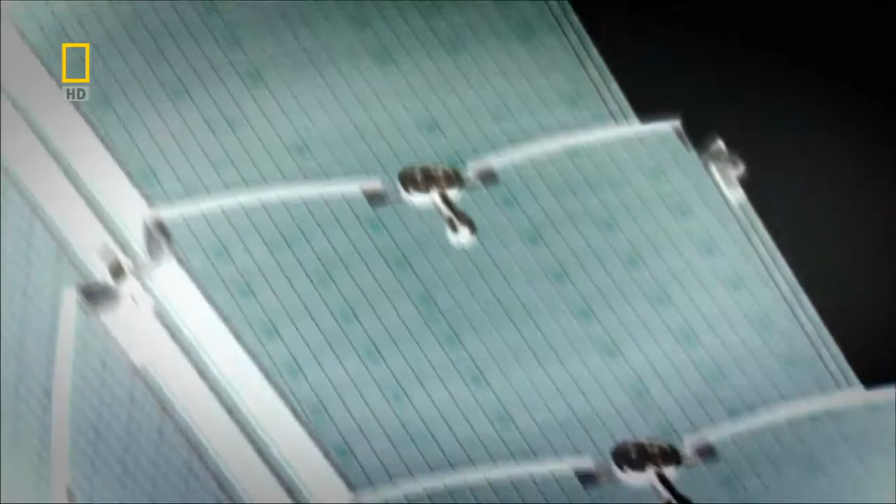This is Taipei 101, Taiwan's record-breaking skyscraper. Incredibly, it's one-third taller than the Empire State Building, and cost $1.75 billion to build. But Taipei 101 not only stands in a typhoon hotspot, but right beside an active earthquake fault line. It couldn't exist without the surprising engineering connections hidden deep within its design.

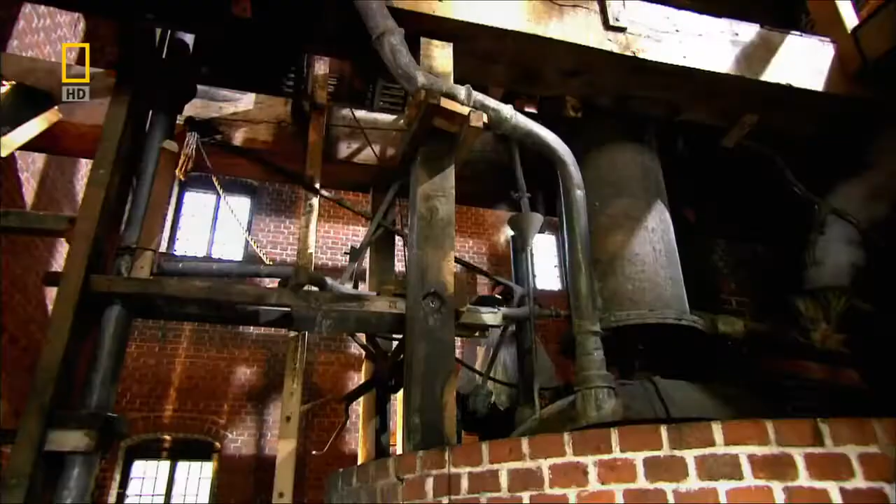A racing yacht—I can't believe the speed of this thing. A birdcage—that didn't last long at all. A steam pump. A safety belt. And a sports car.

So, what's all that got to do with one of the world's tallest buildings? We're about to find out.

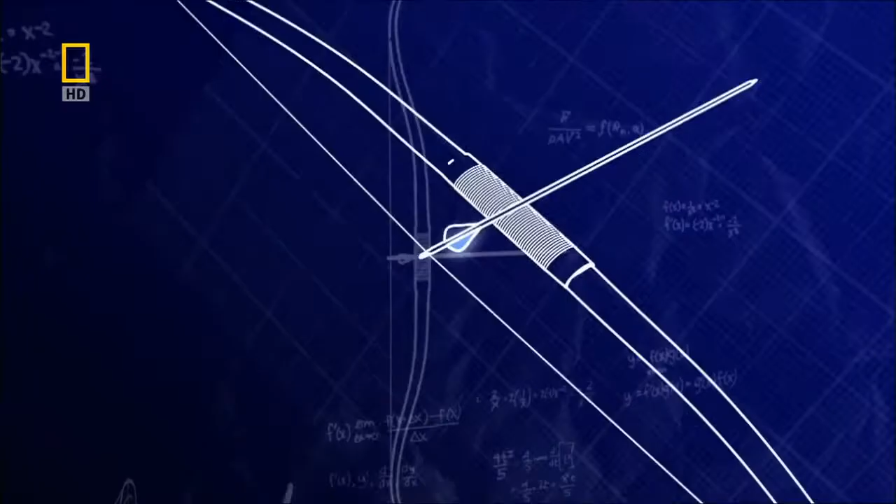I'm on a journey to explore some of the inspirations behind Taiwan's extraordinary skyscraper. In 2004, Taipei 101 topped the record books, reaching 508 meters. Everything to do with Taipei 101 is big. Very, very big, whichever way you look at it.

But what made modern skyscrapers like Taipei 101 possible? Bizarrely, inspiration is thought to have come from a birdcage. Less than five generations ago, skyscrapers like these weren't possible. Engineers feared really tall wood and masonry structures would collapse under their own weight. So the question is, who thought of making buildings with metal frames, and why?

Rewind to Chicago, 1871. The city is on fire. The inferno rages for 36 hours, killing over 300 people and destroying 17,500 buildings. The ruins reveal the cause: three months of drought turn the timber buildings into tinderboxes. As a result, the city bans wood construction. But Chicago continues to grow fast, and with land at a premium, architects search for new ways to build tall.

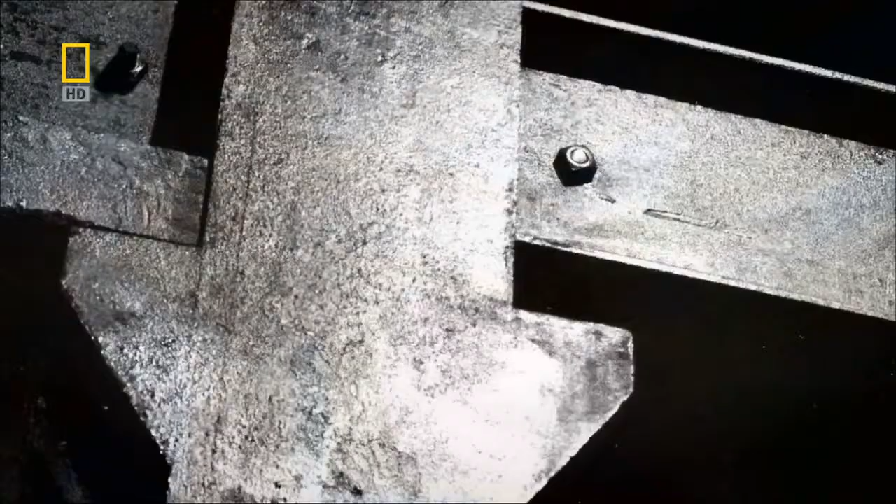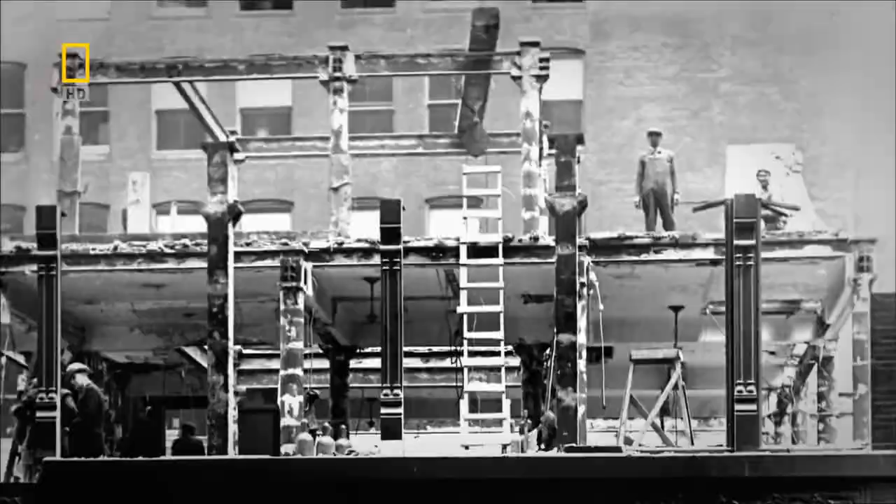Today, it may seem like any bird brain could come up with the idea of building with metal frames, but Jenney's innovation was inspired. He realized that if he bolted horizontal beams to the upright columns and transferred the dead weight of the walls to a metal framework, he'd create not only a lighter structure, but one strong enough to support multiple stories, one on top of another.

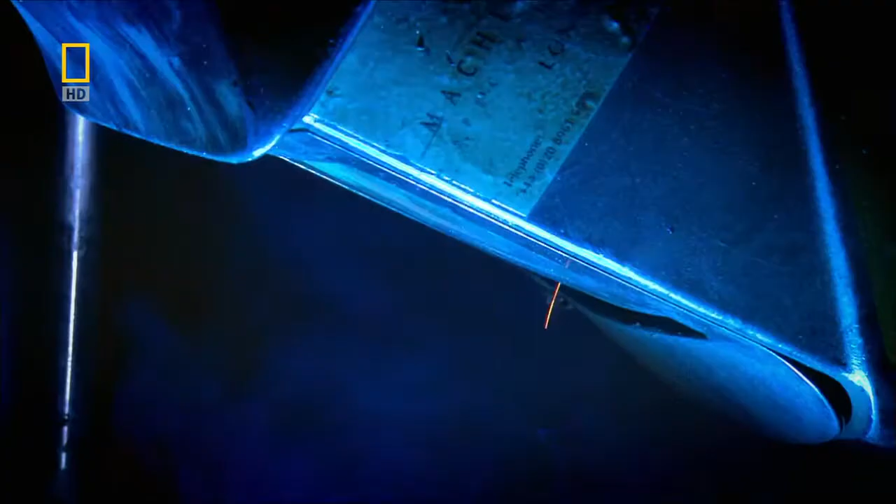I want to see for myself the kind of forces that a cage braced with beams can withstand. So I need some cages that I could destroy, test. In order to find out just what a brainwave LeBaron Jenney's idea was, I've come to a workshop that has, amongst other things, a 25-ton crusher on hand.

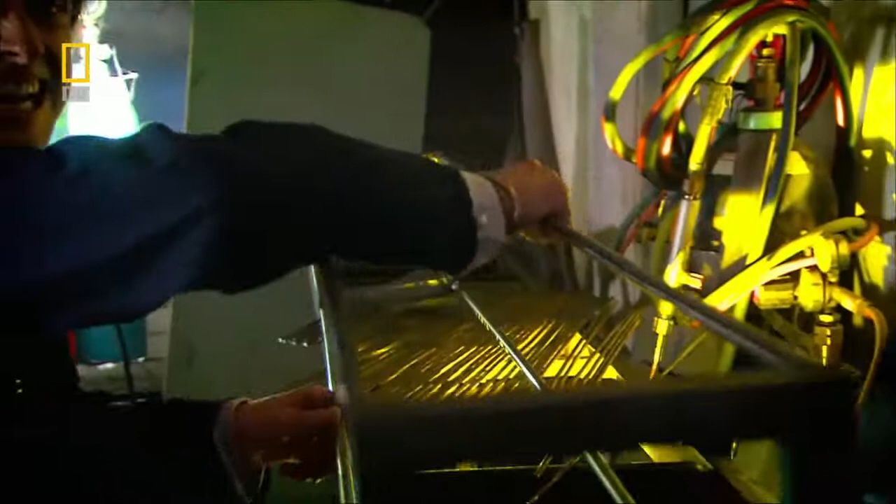Say these represent LeBaron Jenney's columns. What I want to do is see how much vertical load they can take—that's weight to you and me—first without, and then with bracing.

Structural engineer Brenda Marsh has set up an experiment to find out how much downforce it'll take to crush my metal towers. So, Brenda, I know this is all about sort of bracing, or beams, but how are we going to show that? How's it going to work? Yeah, what we're going to do is we're going to take this sample here that has some columns with no beams in it whatsoever, and we're going to stick it in a press over there until it breaks.

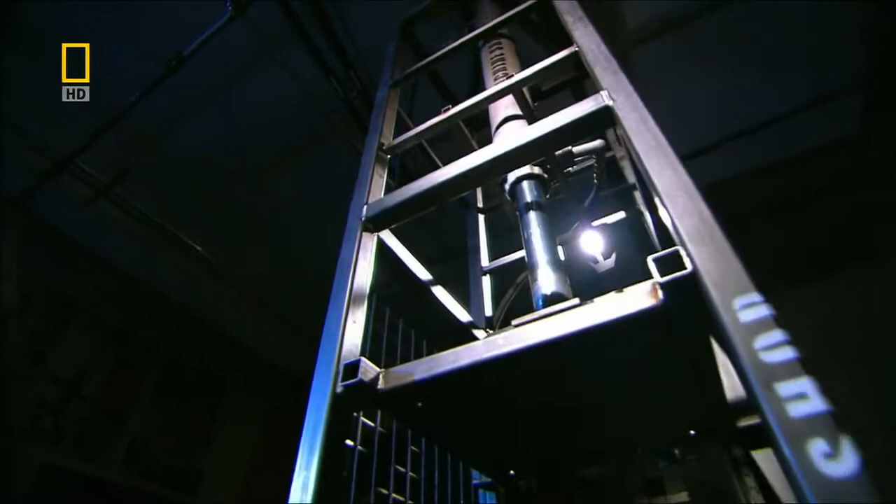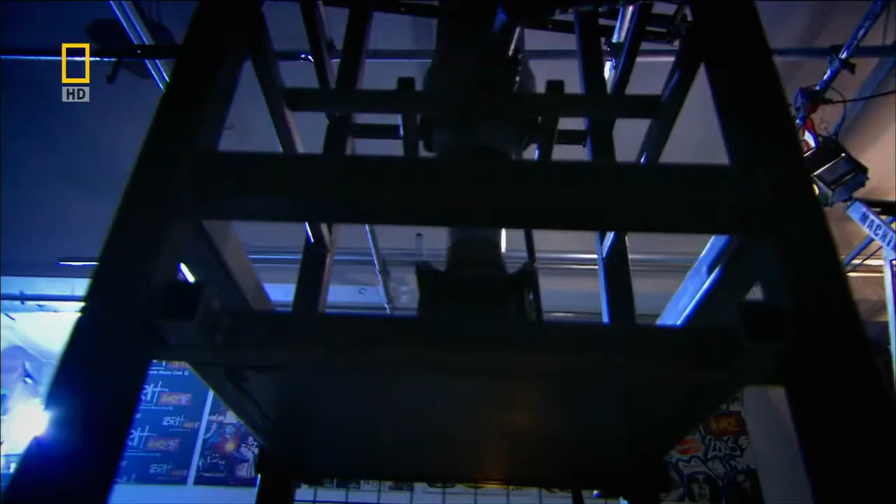What am I doing? You're going to operate the machine. Okay, that's a mistake. Right, I'll do that. You better put that in the business end of it. So I need to lift the ram thing up—apparently it's this lever. Okay, now what I want you to do, Richard, is lower the plate down a little bit. Don't apply the pressure yet. There you go, okay, stop. We need to put some safety goggles on. Oh, okay, of course we do. Make sure we're at a safe distance—that'll protect us. Right, so here comes your vertical loading. Okay, applying it now.

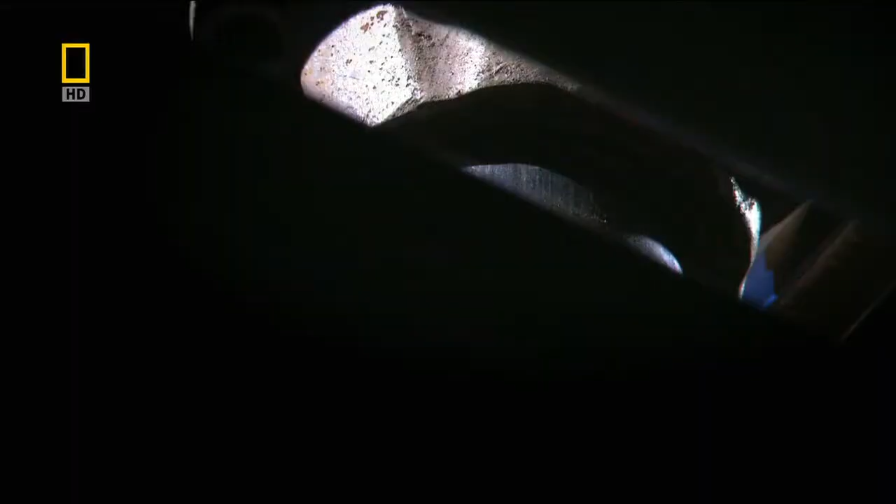The crusher can exert 23 tons of downward force, the weight of a locomotive. Yeah, oh, there we go. You can see the columns starting to buckle. No, it's not—there we go. The whole thing's starting to sway now. It's completely—it's fantastic, look at that. And that's gone. That didn't last long at all. Almost immediately, the tower gives way. And that's it, it's failed. This is what worried the early engineers: a structure like a skyscraper collapsing under its own weight.

That would be bad in a building, wouldn't it? That would be very bad. We design buildings so they don't do that.

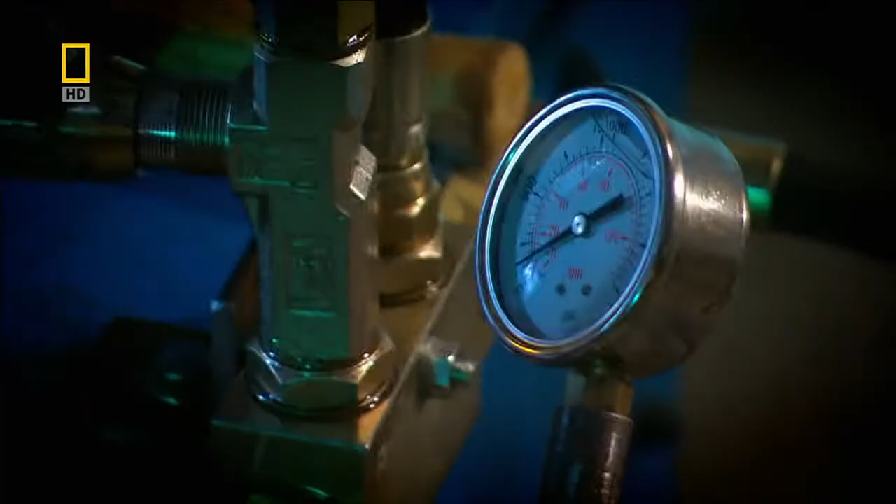Okay, we're all set to do that again with structure number 2. This is the new one. I can see it's got more bits on it, but what are the key points? What makes it so special? What we've done on this one is we've taken what we had in the original structure.

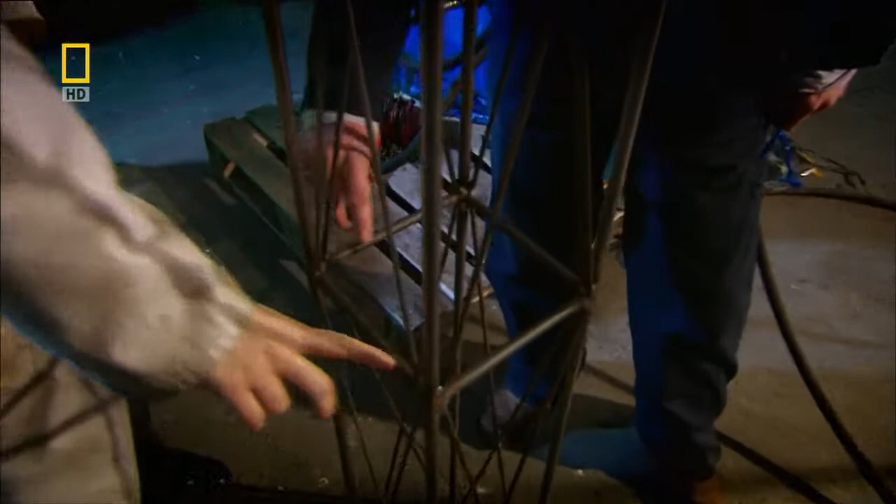So that's these 4 columns. And we've added in some beams here. The original structure, when it failed, the columns tended to bend outward, so what we want to do is hold those in place to stiffen up the columns. So that means all 4 are working together, rather than bending and bowing. Yes. We've got extra bits on as well.

What are these bits? In an original building, you would have walls or something else that keep everything in place, so we're simulating that in this structure with the cross bracing. So for the purposes of this experiment, the important bit is these beams across here.

Can Jenney's tiny horizontal beams help the tower stand any greater downforce? Okay, here we go. You watch the structure, I'm going to keep an eye on the gauge. Straight away, that's what we were on before.

20. That's twice what it took before. I can hear it creaking a little bit. I'm going to increase it. The columns are still holding. Increasing it now. The crusher piles on the pressure. It's just like adding multiple stories to a tower as you build taller and taller. 25. That's going. Oh, there we go. Started to buckle.

I've broken your clever one. But it did a lot better. It was 2.5 times stronger. And that's exactly what I wanted to show, that if you brace off the columns it can take a whole lot more load.

Can I say something, though? Because instinct tells me now, tie it together, it'll work. Why? Well, it's obvious now because we've seen it, it happens all the time. But before anyone ever thought of it, it's not the obvious solution.

Using his inspired idea, Le Baron Jenney builds the first modern skyscraper, the Chicago Home Insurance Building, completed in 1885, supporting its entire 10 stories on a metal frame.

So, thanks to a birdcage and some smart thinking, the great-great-grandfather of this monster tower was born. That's how structural engineers could build this and all its record-breaking 101 floors. But it's more remarkable than just scale.

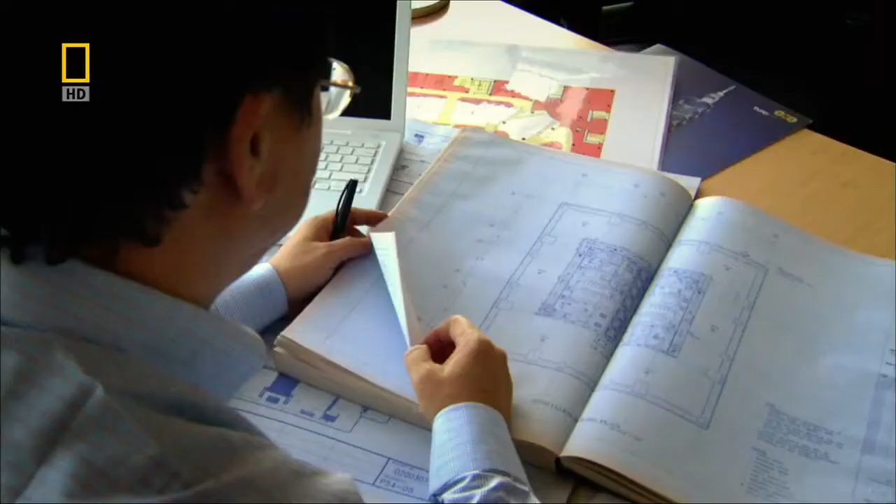When you build one of the tallest structures in the world in the middle of a notorious earthquake hotspot, how do you make it strong enough to stay standing, but flexible enough to withstand the potentially disastrous effects of a seismic shock? The award-winning Taiwanese architect of Taipei 101, C.Y. Lee, found inspiration for his solution in nature, specifically his nation's long-standing connections with bamboo.

CY, what can possibly be the connection between an immense structure like Taipei 101 and bamboo? I mean, it's not made of bamboo, is it? No, it's not made of bamboo, of course, but in a lot of ways it's like bamboo. How? I think bamboo is a plant that doesn't look very strong, but it has this nature of elastic. It may bend a little bit, but it doesn't break.

Bamboo is a giant, fast-growing grass. The secret of its strength and flexibility is its internal shape. Bamboo grows in hollow, jointed sections, like a series of solid-ended tubes. These are separated by partitions that help reinforce the stem.

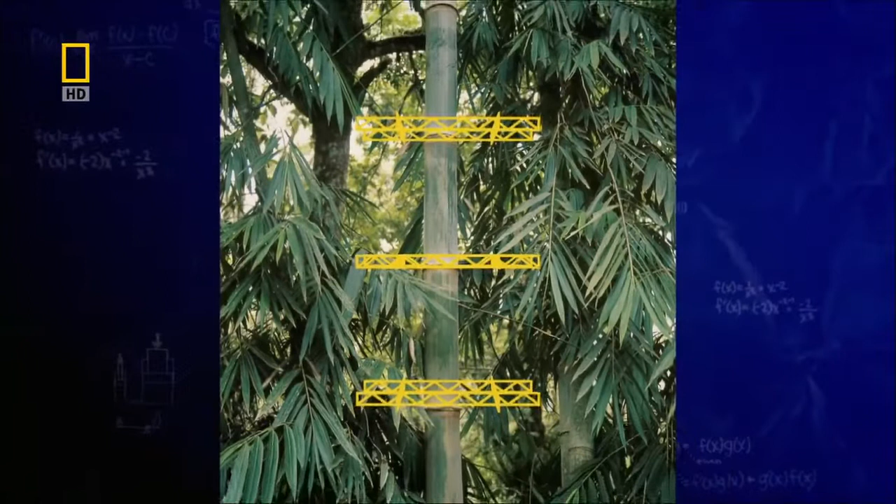Inspired by nature's solution, Wang designs giant steel trusses to connect across the columns at every 8th floor on Taipei 101. This bamboo-inspired design must meet strict seismic targets.

The owners required Taipei 101 to withstand the most powerful earthquake expected to hit the city within a 2,500-year cycle. But nature tests C.Y. Lee's design even before it's complete.

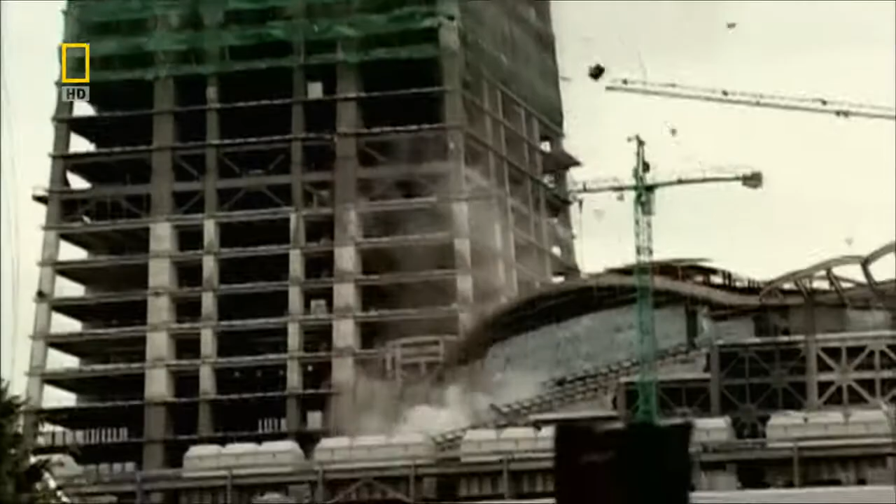In 2002, an earthquake strikes. Shockwaves tear across the island. Taipei 101 shakes violently. Anything not firmly attached crashes to the streets below. Dislodged construction cranes tragically take 5 lives. But Taipei 101 stands firm and construction resumes.

2 years later, the completed megatower is crowned the world's tallest building.

But by designing a structure to withstand quakes, Wang creates a new challenge. Tall buildings sway in high winds and even risk collapse in extreme storms. And Taipei 101 is no exception. In fact, it's not just windy, it's smack bang in the middle of a typhoon hotspot. Typhoons, Asian hurricanes, can batter Taiwan 3 or 4 times a year.

In 2007, 160-kilometer winds kill 9 and cause $100 million of destruction. To keep Taipei 101 standing in a superstorm, C.Y. Lee turns to an engineering solution developed 3,500 years ago.

To discover this ancient engineering secret, I'm meeting Ken Maschke from the company that helped design Taipei 101. Ken wants me to try sailing, but not in an ordinary sailboat.

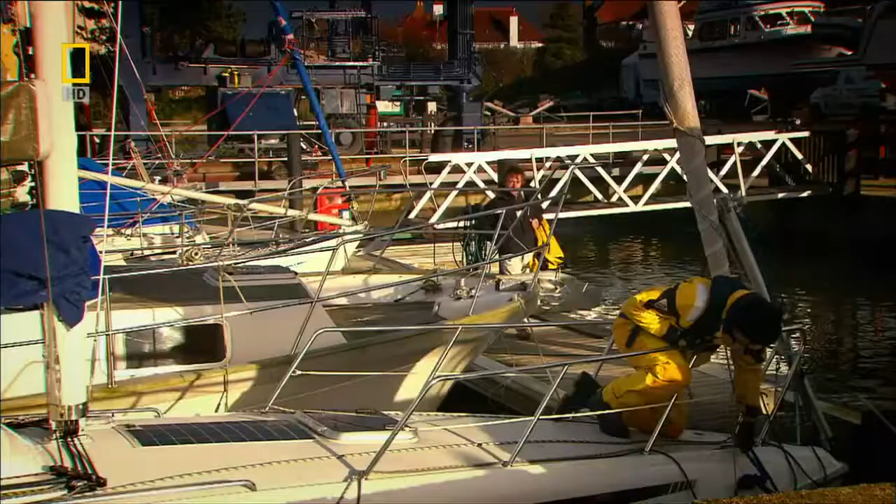Ken. Hey, Richard. Hi, how are you doing? Come on board.

It's narrow, light, and has no keel sticking down into the water for stability. So how can it stay upright against the wind?

This extra hull, one of two, is the engineering connection this craft shares with Taipei 101, and why Ken's got me on a sailboat. Now it's got me working. These clever devices are called outriggers. There it goes. They keep a sailboat stable in high winds. Look at that.

Before we hoist sail, Ken explains the basic principle of the outriggers. If you stand with your feet together and I shove on you, you're likely to fall over. If you spread your legs, it's going to be a lot tougher. Now, the same thing, in essence, is what we've done here. We spread out the distance between which the force acts.

The idea of outriggers goes back 3,500 years to the Polynesians. Using them meant the early mariners could paddle or sail fast and stay stable. I just hope these outriggers work as well for me today. Looks a bit cold in there.

With sails up and stabilizers out, it's time to see if we can push Ken's theory to the limit. I can't believe the speed of this thing. Today, using outriggers like these, yachts can sail across the Atlantic in just 4 days.

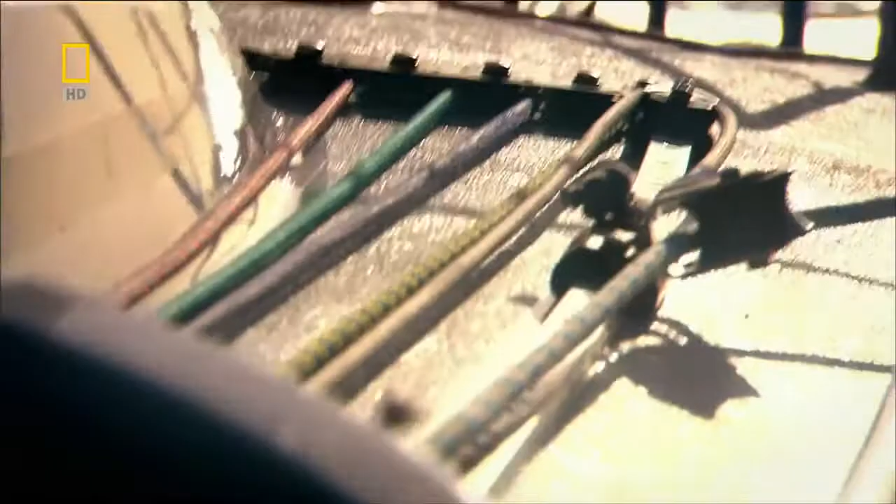Can this go over? Yeah. Would you mind awfully if it didn't? When it works, it really works.

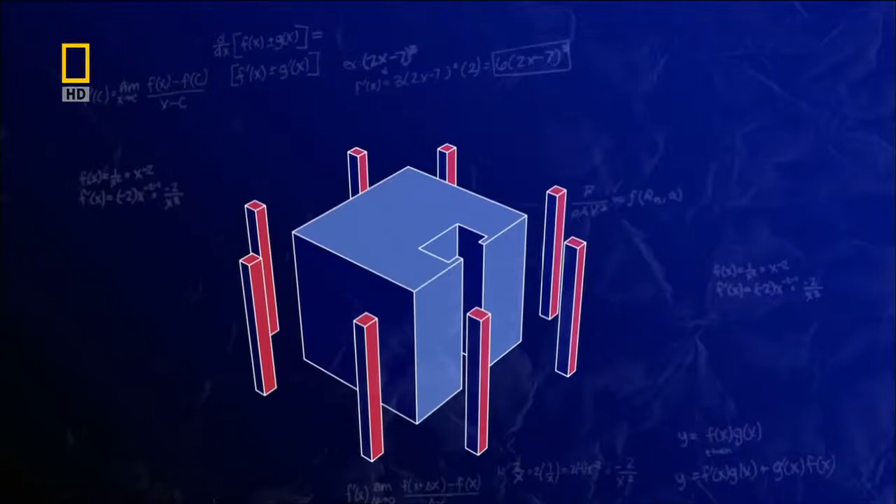I can see how these outriggers work on a boat, but the same theory on a building. How? The outriggers are part of the wind-resisting system, which includes a central core that's very stiff, but not stiff enough by itself. So we add these outrigger trusses to transfer force out to the exterior columns, like the pontoon that you're standing on right now. We can take the outrigger idea and apply it all the way up the building. So actually in Taipei 101, we have outriggers every 8 floors.

With a building as big as Taipei 101, every structural challenge is supersized, especially when working with the construction world's favorite material, concrete. Every floor on Taipei 101, including the 101st, is concrete.

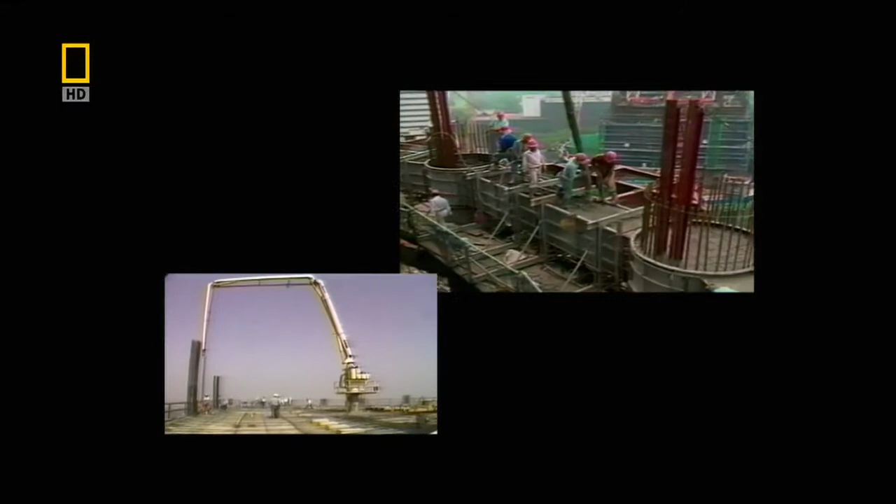To pump concrete that high requires a super pump that has its origins in the 18th century. Rewind 300 years. The English mining industry is in trouble. The deep mines are flooding, and the man and horse-powered pumps available can't drain water fast enough. The mines are going under.

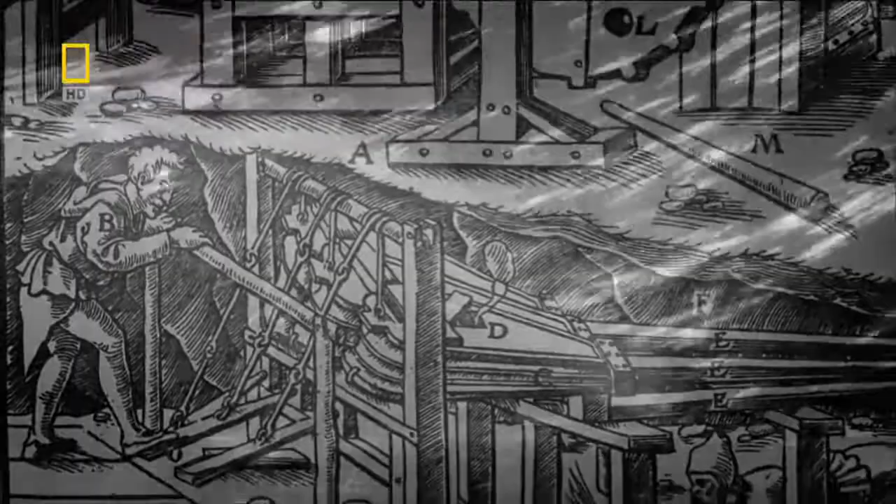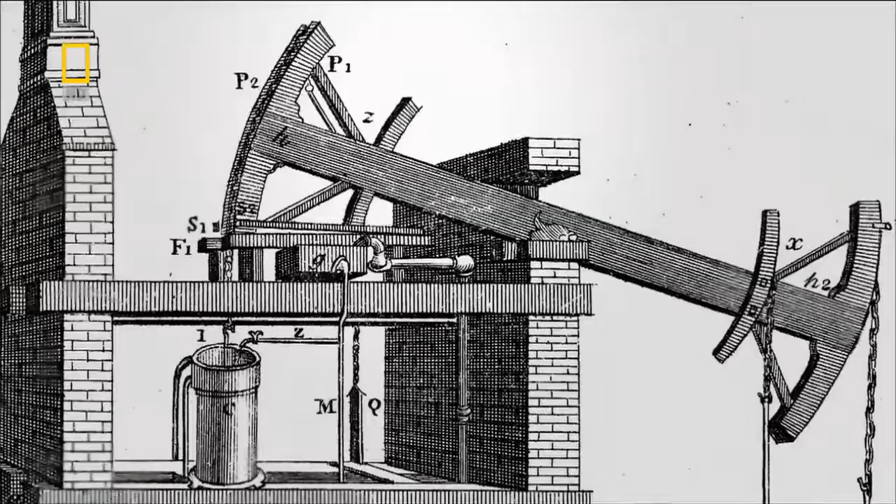Inside this modest building sits the machine that saved the day and kicked off the Industrial Revolution. It is the result of a stroke of genius from an inventive preacher and ironmonger, Thomas Newcomen. This is Newcomen's Nodding Donkey, the first piston-powered pump, and the first really practical engine for pumping water.

Newcomen's idea was to harness the power of the pressure difference created by a vacuum. He used it to move a piston. It works on the vacuum created by the steam when it's condensed, on the principle that steam occupies a certain amount of space, but when you cool it and turn it back to water, it occupies a fraction of that space.

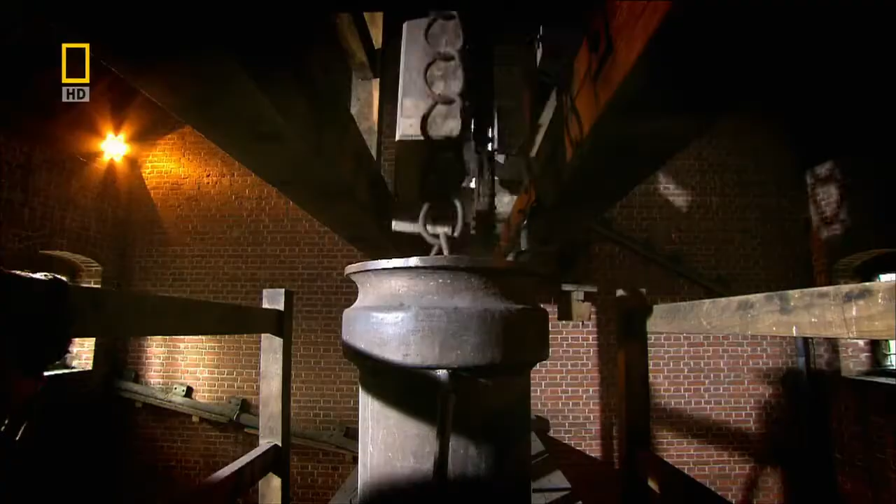So under here is the water tank, and under that is the heat, heating it up in the boiler as steam up into that big cylinder, which is the piston. That pipe goes into the bottom of the piston and sends cold water in, which condenses the steam, and suddenly that huge volume of steam is reduced to just a tiny volume of water. Then atmospheric pressure outside on top of the piston is greater than the pressure inside, and it's got no choice.

The piston has to come down, drawing the beam that way to do its work. Then it's counterbalanced, so it just pulls the piston back up to the top. More steam goes in, condenses it again, and draws it back down. They were very clever.

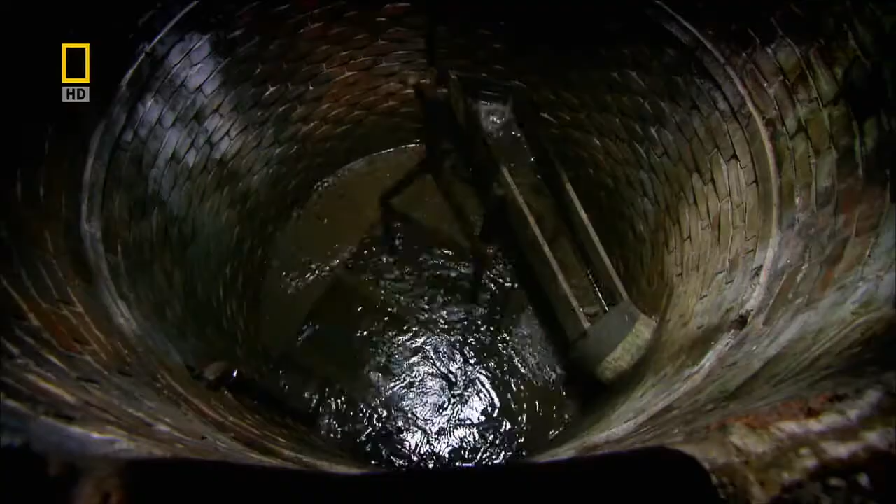Throughout the rest of the 18th century, Newcomen's invention drains countless mines, helping fuel the Industrial Revolution. 24 years after his death in 1753, the first Newcomen-style pump crosses the Atlantic to begin draining a copper mine in New Jersey.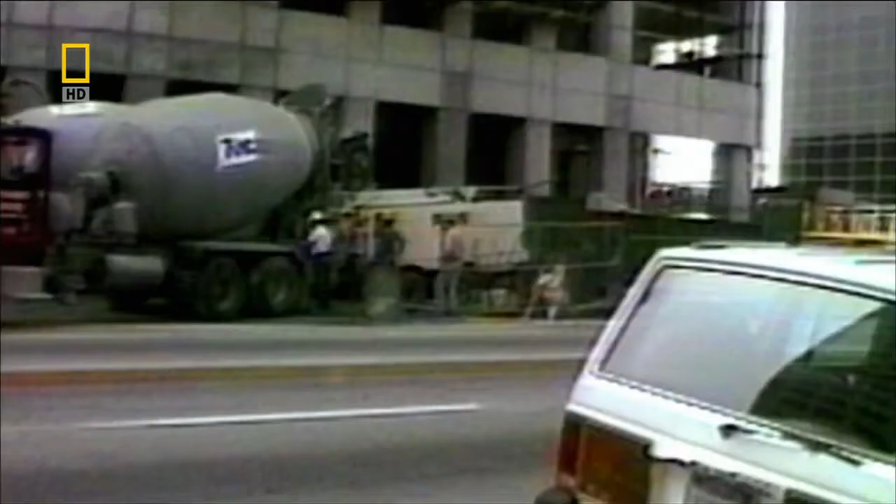Fast forward two and a half centuries to the offspring of Newcomen's engine. These powerful piston pumps use a vacuum and mega pressures to deliver concrete skyward and into the record books.

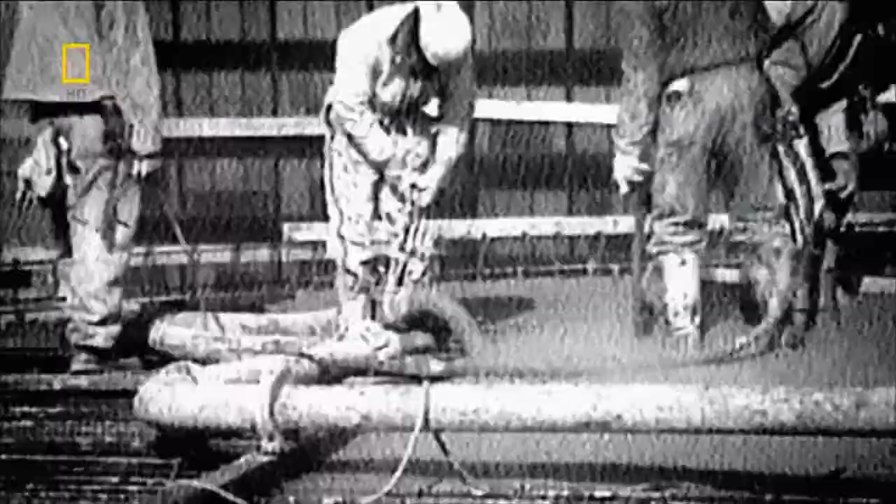In August 2003, a world record was broken, just up there. It was the highest anyone had ever pumped concrete on a building. It had to be raised 101 floors from down there. A pipe filled with concrete this high weighs well over 13 tons, and pumping it takes technology Newcomen could only dream about.

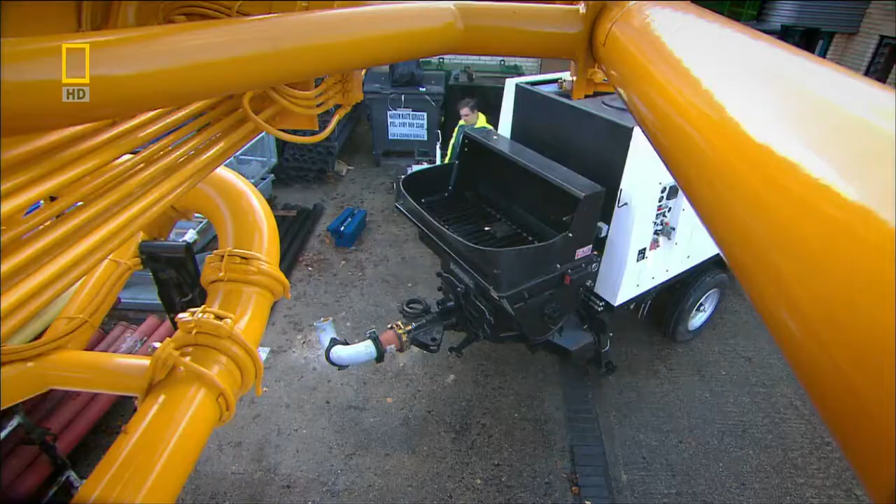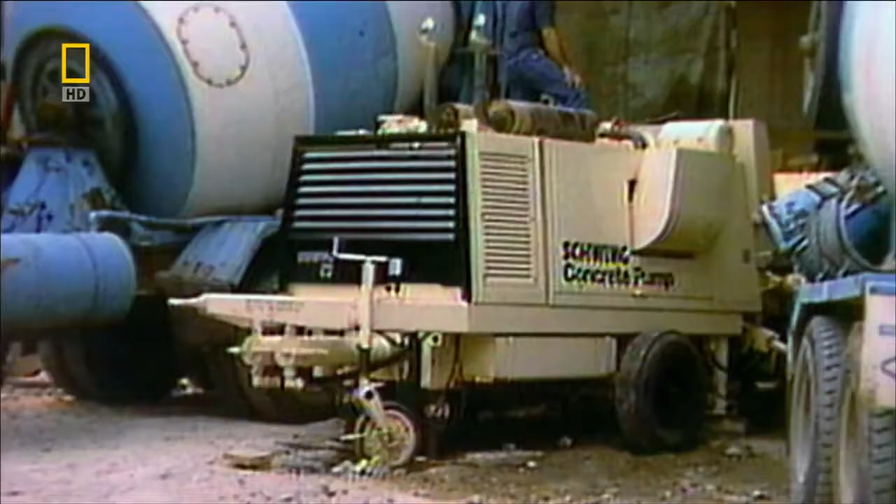Pumping concrete is big business, and as buildings get higher, the technology to power it to the top gets more sophisticated. This is the business end of a pipe network that extended over 440 meters that way, a chain of interconnected pipes stretching to reach the high floors. On Taipei 101, the pump sits near the base of the building, and the rooftop lies 4.5 football fields above.

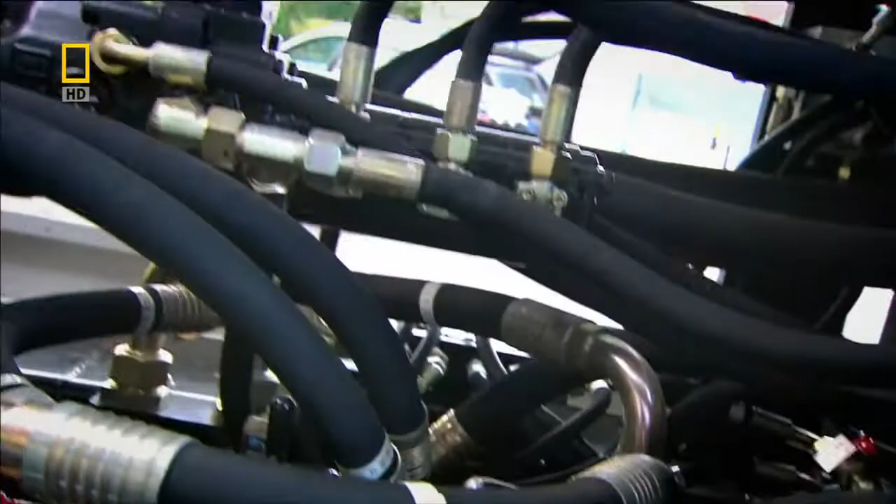The concrete is kept flowing by a super pump. Meet the 12-cylinder, 419-kilowatt Deutz diesel engine. This is the heart of the operation. Literally, it's the pump that keeps the construction alive. The moving parts in here made it possible to pump the concrete even to the highest floors.

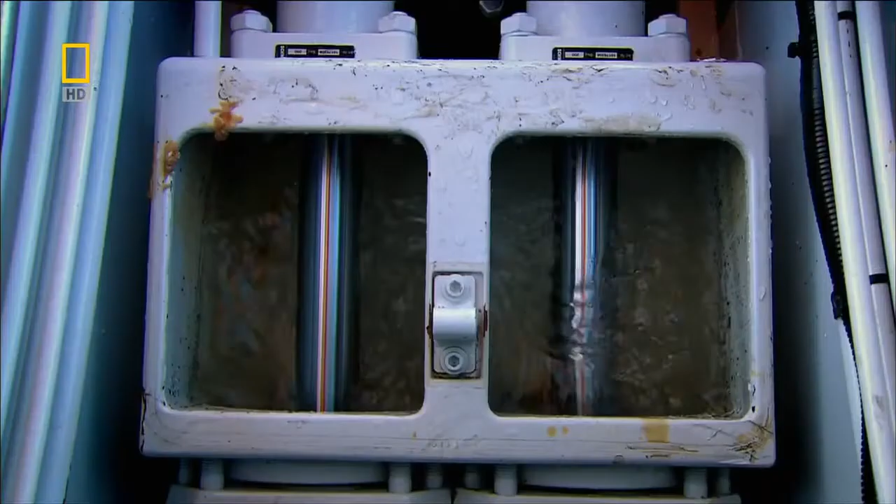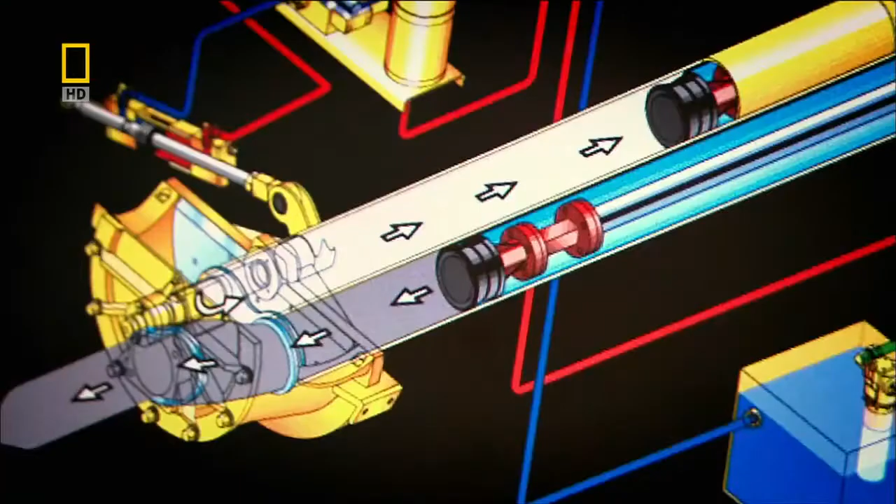A column of concrete must be kept flowing, or the mix will separate, or even worse, set. To keep a constant flow, the pump operates two pistons: one sucks while the other blows. A simple vacuum, like Newcomen's, pulls the liquid concrete in, then the huge diesel engine generates hydraulic pressure to push it out. It's Newcomen's ideas, just hundreds of times more pressure for a much weightier task.

I want to see what kind of pressures the Taipei 101 pumping world record used. So pump specialist Phil Suri devises a pressure demo that will blast my weight in concrete.

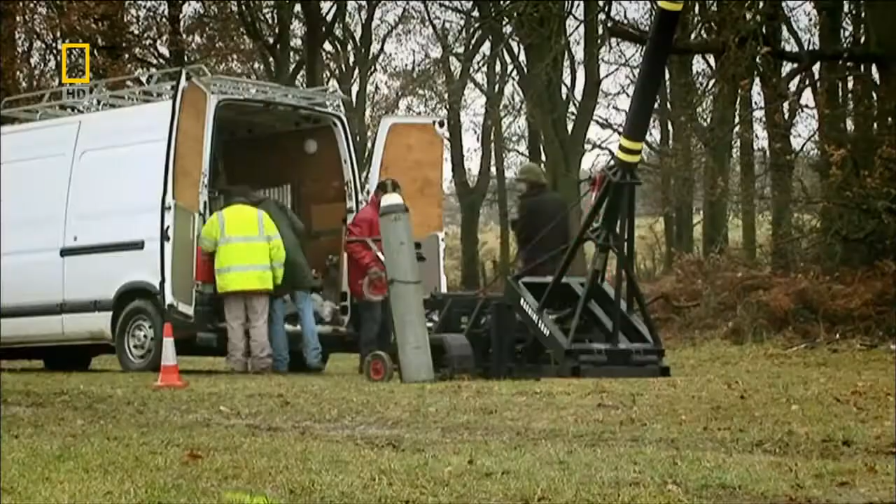It's difficult to get your head around the kind of power and pressure that modern pumps can generate using those old techniques. So rather than just talk numbers about it all, we've come up with a rather clever way of demonstrating very graphically what that power can do. We're going to use pressure to move some concrete, but we're going to do it in a rather different way.

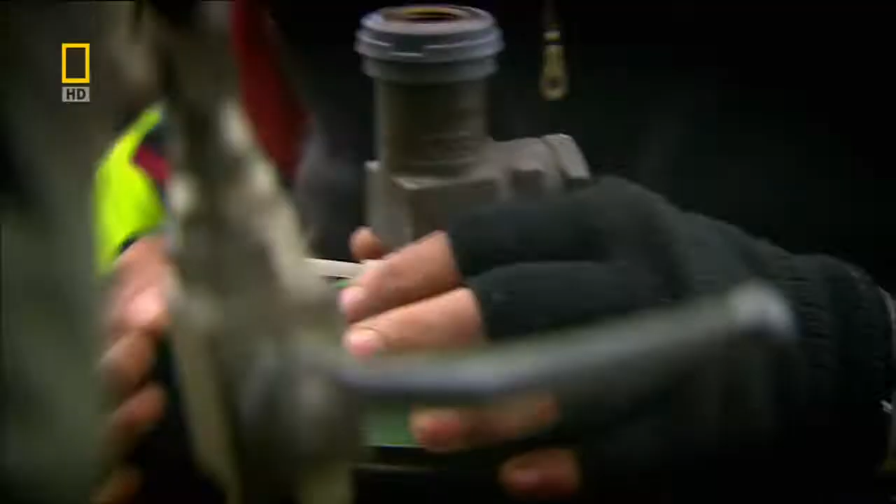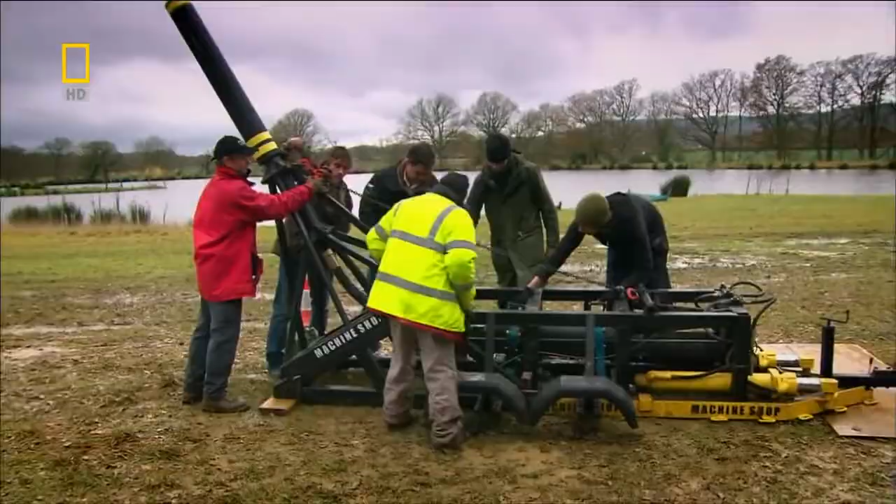Using a concrete missile as heavy as me, Phil and his team are going to demonstrate what 100 bar of pressure can do. One bar, named after the Greek word for weight, is about 1 kilogram per square centimetre, or roughly the atmospheric pressure all around us. I pump my car tyres to three times that, 3 bar, and that seems like a lot.

It's a firing cable. Huh? That's a cable to fire it. That's a trigger. Right, that's what I said. You trip over it. Well, sorry. I'm sorry. But this will give me an idea of what?

Of what 100 bar of force is capable of doing. At Taipei Tower, the pump we used there was capable of 200 bar pumping pressure. This is only capable of 100 bar. So your pump's roughly half? Twice, yeah, your pumps can generate twice the pressure of this. Exactly, yep. And you're just telling me that because you're proud of your pump. That's what that is. Yes, I am. Yes, you are. I am.

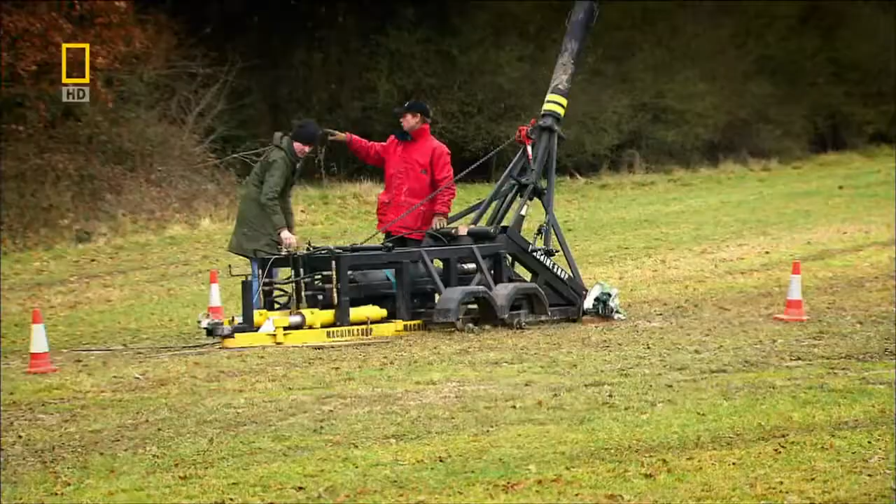This is a first for me, obviously. I've never seen a chunk of concrete my weight fired from a cannon. Phil is keen to see how far his concrete missile will go. The safety team are keen to make sure no one is on the receiving end.

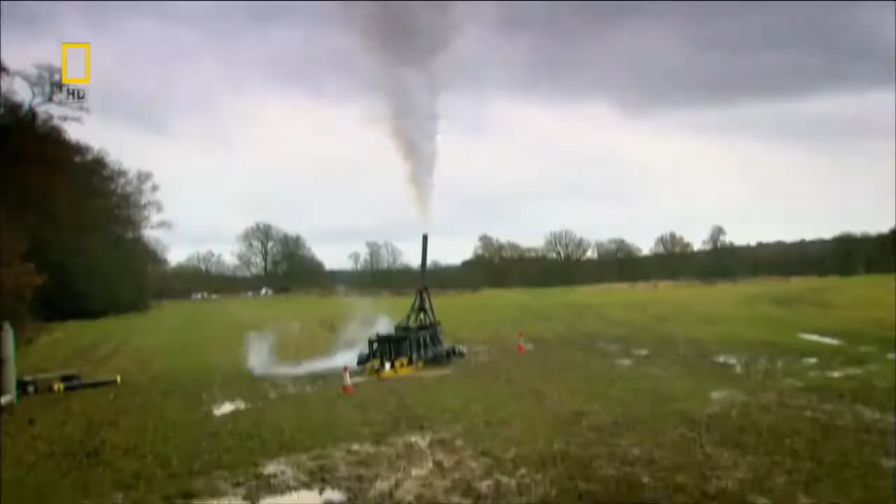Wow, so that's half the pressure on a lump of concrete the same weight as me. Yep, you're what, about 140 pounds? Yeah, 64 kilos. Okay, 10 stone.

Have we got to go and get that thing? Yeah, now. Let's do it.

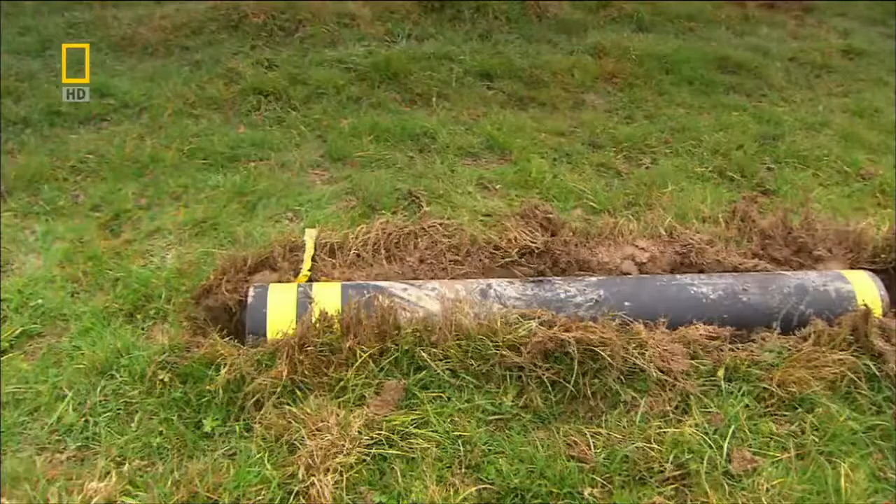The launcher blasts my concrete twin well over 90 meters. The top of Taipei 101 is 4 times that distance, straight up. And the record-breaking concrete column was 220 times heavier than me. I now understand the amazing pressures Phil's pumps achieve, sending concrete to the 101st floor of the Taipei Tower.

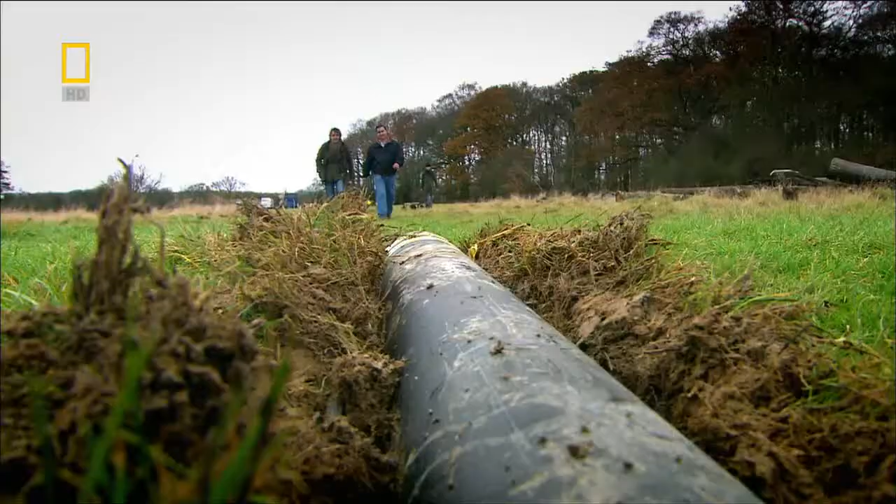It's buried itself, yeah. It's quite impressive, look at it. 106 paces.

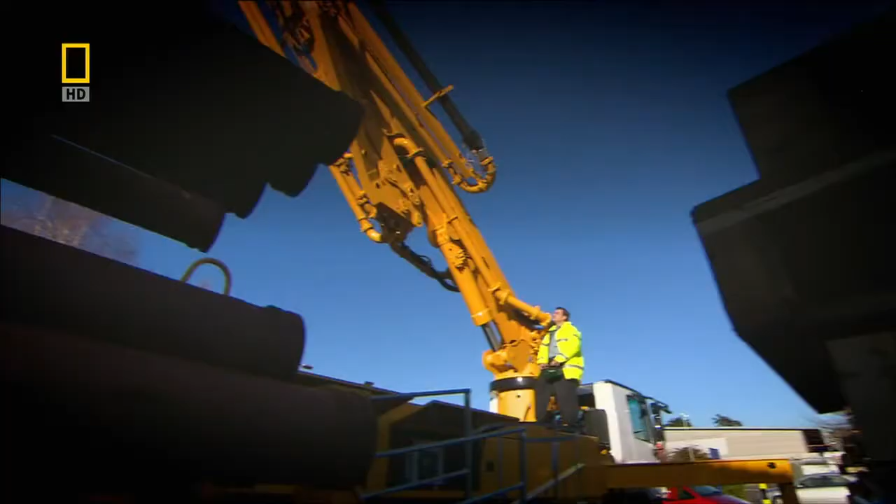The mechanical pump has come a long way from Newcomen's wheezing steam engine. That's how they got concrete to the top. But how do you transport people to such heights safely and quickly?

Which brings me to elevators and my next connection.

Whatever type of transport you're using, including elevators, there's a problem with going faster: you've got to be able to stop faster too. Higher speeds mean more braking loads, and more loads mean more heat. So how do you provide a braking system that can work without overheating and risking a fire? And what's that got to do with a sports car?

Being big and tall like Taipei 101 means lots of elevators. In total, 61 elevators are needed to keep the 10,000 people that Taipei 101 is designed for on the move. 34 are even double-deckers. But for tourists wanting a flying visit to the sky-high viewing gallery, these regular elevators aren't fast enough.

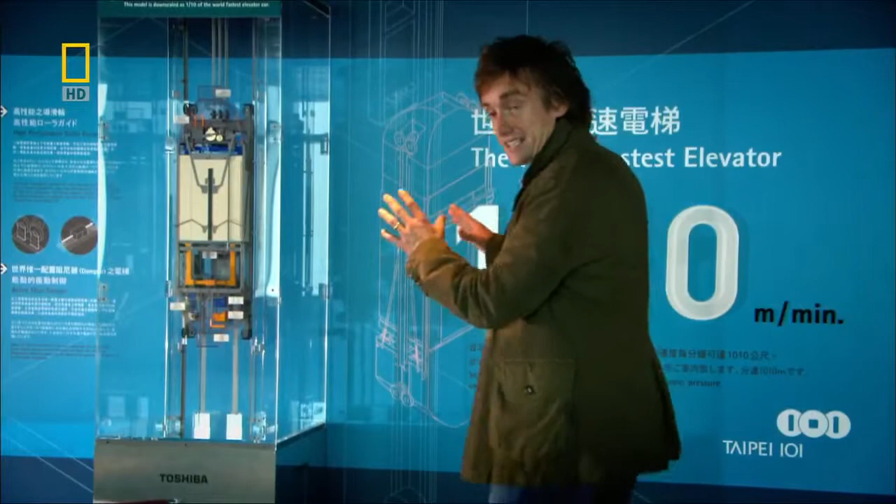The challenge is whisking a visitor like me directly to the 89th floor, super quick, but super safe. This is the answer, the world's most technologically advanced elevator. Well, obviously this is a model. The real thing's bigger, so you can get in it.

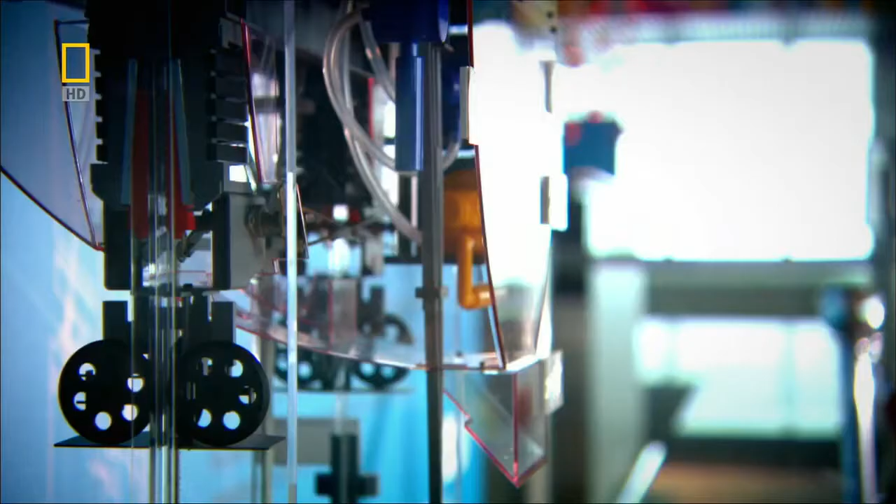Digitally controlled, it has a pressurized aerodynamic capsule with shake reduction and even earthquake sensing. The designers say it also goes really fast. I want to know how fast.

This elevator, one of a pair, has been officially certified by the Guinness Book of World Records as the fastest elevator in the world, and they've given it to me to play with. So they reckon it can do the next 84 floors in 37 seconds.

Ellie, when you're ready, if you would, thank you. In your own time, go. As soon as we start moving, I'll start the clock. Go, I think we've started moving. I can't tell, there's no noise. There's a fan. Apparently the whole lift is pressurized like an aircraft to help stop your ears from popping.

Talking of aircraft, this actually accelerates vertically more rapidly than a commercial passenger airliner taking off. And my ears are now popping. Right, we're 20 seconds in, 25. There's no sense that we're going faster than the city speed limit. We're breaking the speed limit. If we did this horizontally through the streets, we'd be in trouble. There's no noise.

And that's it, and that was under 37 seconds, and this is the top. The high-speed elevator launched me at over 60 kilometers an hour, almost half a kilometer into the sky. It's a long way up and a frighteningly long way down.

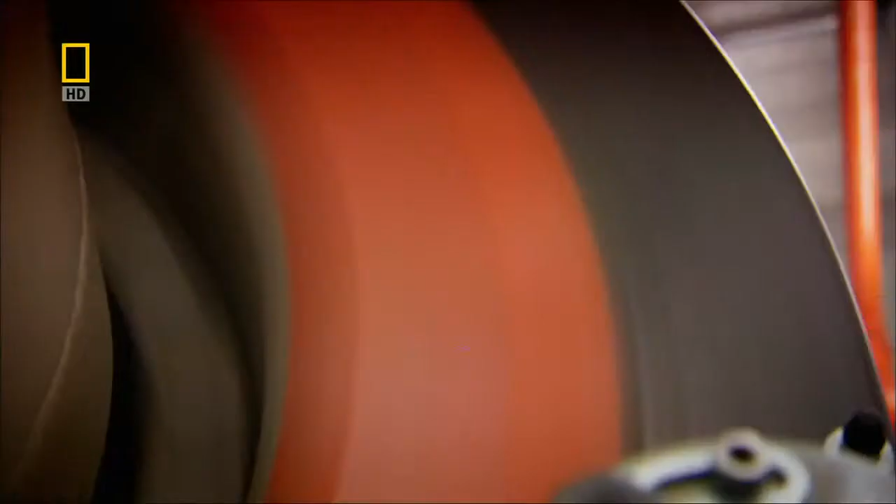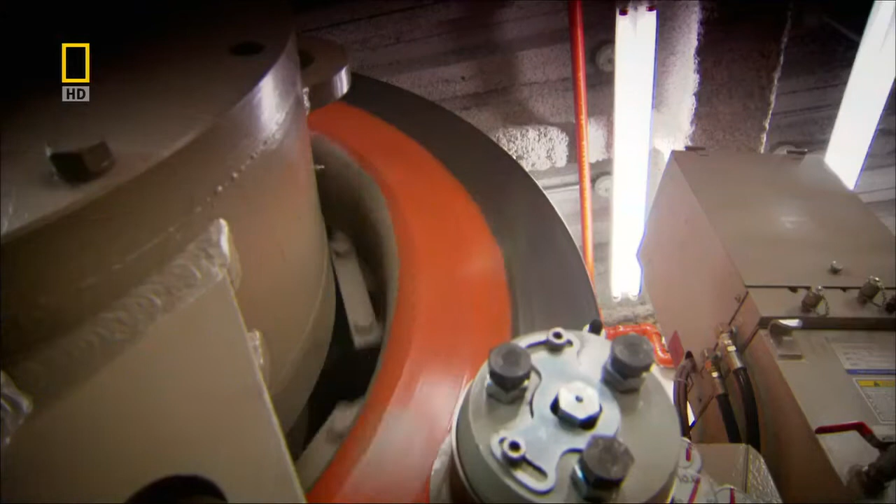If the elevator cables give way, it's an 84-floor drop with only the emergency brakes between you and the basement. In extreme events like this, metal brakes overheat and can fail. To halt Taipei 101's super elevators, the engineers needed a material that performs consistently, even when things get seriously hot.

It's an engineering line of thought that owes a lot to the automotive industry. This is a high-performance Porsche Boxster S, and my next connection.

Porsche was one of the first car companies to experiment with alternatives to metal brake discs. The material that performed consistently at extreme temperatures was ceramic. Their tests report the ceramic disc brakes don't get as hot as metal and can even grip better the hotter they get. I want to check out the difference in performance between metal and ceramic brake discs for myself.

So I'm meeting Craig Dawson, a motorsport engineering expert. So, Craig, what are you doing? Well, basically, I'm trying to get a benchmark for both the disc temperatures at the moment on the two cars. These two cars are completely identical in every way, apart from the brakes. That's correct. The yellow car has a traditional cast iron disc, like every modern-day road car. The red car has what is known as a ceramic disc.

The ceramic compound that makes up these brake discs is usually silicon carbide or silicon nitride. It's baked at extremely high temperatures to form a heat-resistant material.

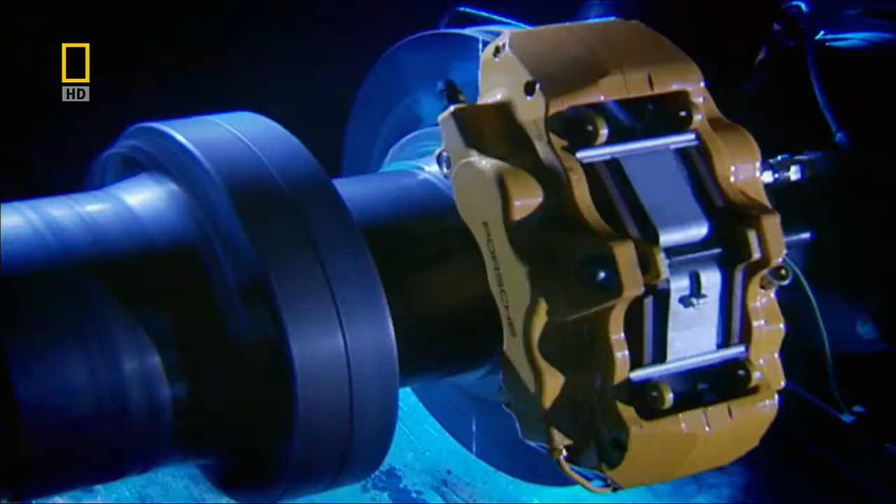Why is heat such an issue in brake discs? Well, with a cast iron disc, it can get to the point where it gets too hot. It begins to not work as well. The friction that it actually produces goes down. So the pads can't grip as well on the disc and it doesn't work as well once there's too much heat.

And there's double trouble when metal brakes overheat. Not only do they stop gripping as well, but if they fail to dissipate the heat, they can set fire to what's around them, as this very extreme example from the world of motor racing shows. We have flames! Not good for emergency brakes in an out-of-control elevator.

Almost the opposite applies with the ceramic brakes. It needs heat to get them to work in the first place, but they can go to a higher temperature as well. So how are we, with just these two cars, going to show all of that?

Well, basically, you're going to perform a series of repeated stops, which are going to build the brake temperature up. Here I go. 5 laps. The first test: drive very fast, then hard on the brakes 20 times over 5 laps. Reckon I can manage that. The idea is to build up the brake temperature so I can feel if their performance changes as the heat increases.

To gauge the temperature, we're using a camera that turns heat into visible light. The reds are hotter than the blue colours. White means it's getting serious.

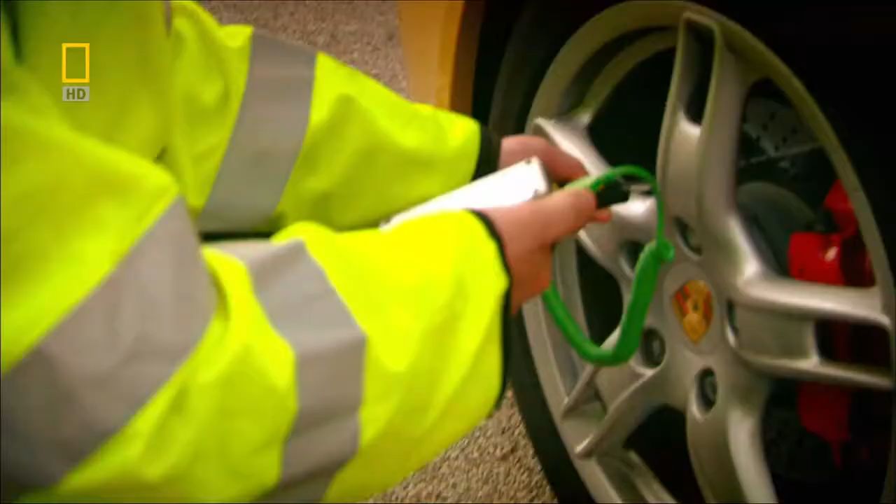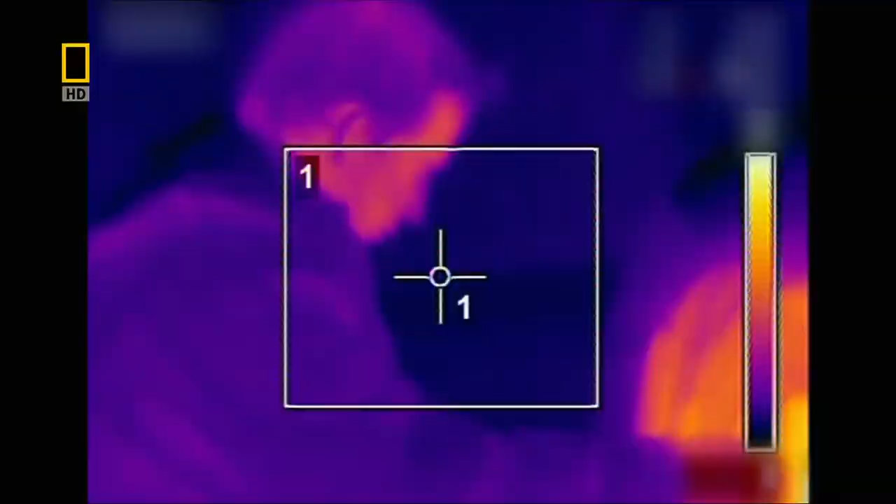Craig also wants to see how quickly they lose their heat. A lack of heat loss is what can build catastrophic temperatures in metal discs. I can smell brakes. I don't know if that's good scientifically. 627. Okay. When I pull in, Craig immediately checks the surface temperature of each brake disc. The readings on the front discs are well over 300 degrees centigrade.

They're still functional, but as hot as the inside of a jet engine. 290. Craig will take a further series of readings to check the rate of cooling. Thinking back, the brakes did begin to feel different once they'd got very hot, but still perfectly safe.

Now it's time to take the ceramics for a spin. How will they perform? To begin with, everything seemed the same. The ceramics get white hot on the heat camera with my multiple braking. But then I notice a difference. The brakes feel really sharp each time I use them, even as they heat up. Every brake is as good as the first.

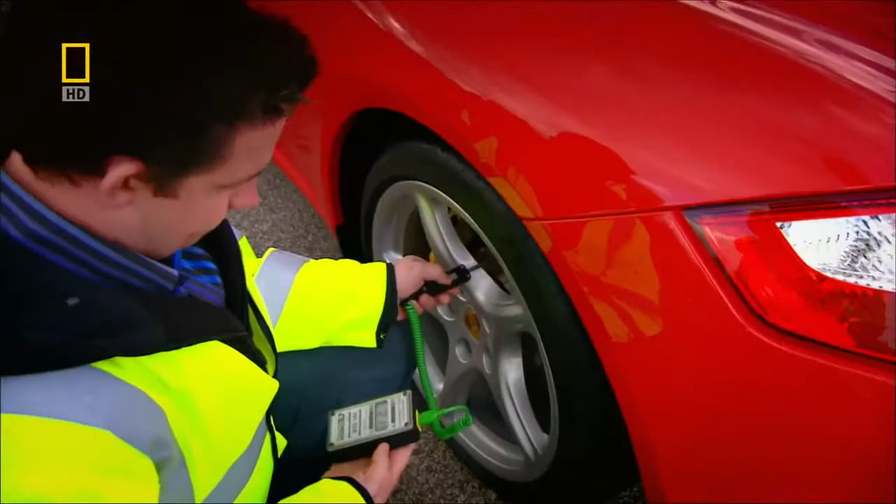When I pull in, Craig gets an immediate result. 31. His first temperature reading on the ceramics is lower than the metal. They stayed cooler. And did you notice any difference in the actual braking performance itself? Yeah, they clearly weren't being as affected by the heat that was being put into them. And it felt fresh each time I braked again. So every time it felt more consistent, basically. Yeah, exactly.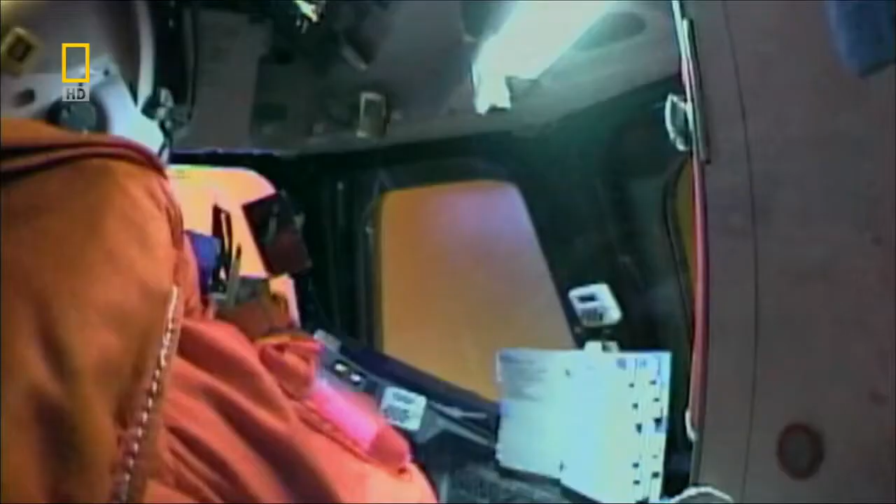Using a compound based on sand, aerospace engineers at Lockheed Martin developed a new silica ceramic insulation. This forms the basis of the shuttle's heat tiles. A ceramic tile can heat to over 648 degrees centigrade on one side and stay cool enough to touch on the other. In really extreme situations, the tiles can withstand temperatures of over 1600 degrees centigrade. That's hot enough to melt rock.

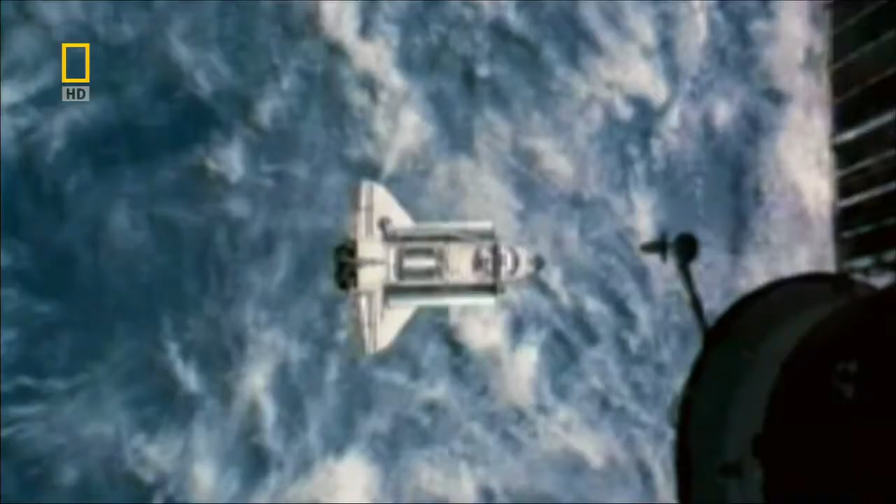Heat-resistant ceramics are now well and truly proven, with their origins in rocket science and a track record in performance car brakes. On Taipei 101, they are the engineer's choice for brakes to halt a runaway high-speed elevator.

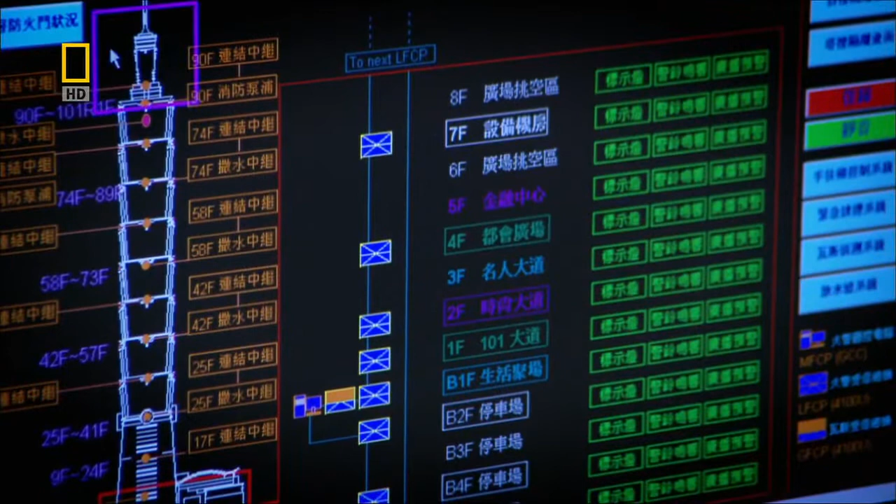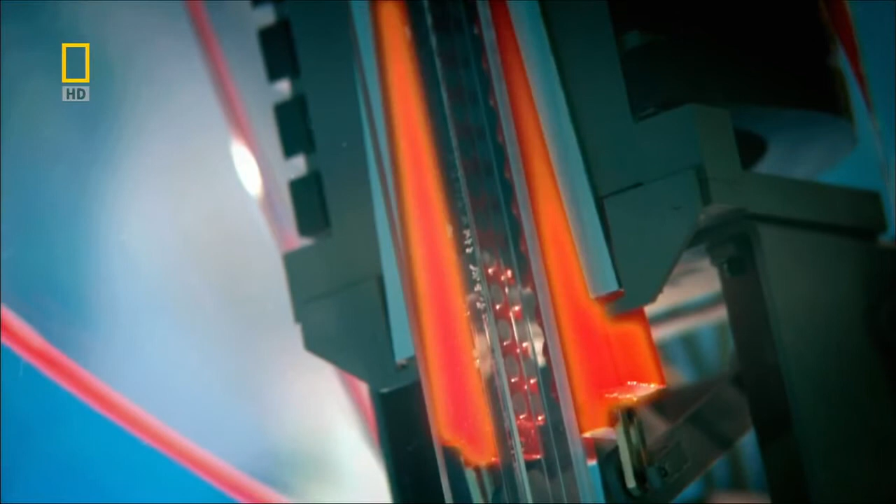This is mission control for Taipei 101, where they monitor everything and everyone. One full section just monitors all the elevators, including the state-of-the-art ceramic emergency brakes. Should the cable snap on the high-speed elevator, the emergency brakes will activate. Two silicon nitride ceramic pads will grip a steel safety runner. The pads will withstand almost 1,000 degrees centigrade. That's as hot as molten lava.

The threat of tropical storms hangs over Taipei 101. It's not fear of collapse, but a delicate issue of customer comfort. The typhoons that blast through the city of Taipei mean driving rain and 160-kilometer-an-hour winds slam against Taipei 101, and it feels it. You see, a tall building like this is prone to bend in the wind. Remember the bamboo, flexibility and all that. Now, some flexibility in a tall building is a good thing, and it's difficult to avoid, but too much, and it can give the people inside it motion sickness.

When I asked the engineers what a typhoon might feel like in a tall building, they said, try eating soup on a bus. So I did.

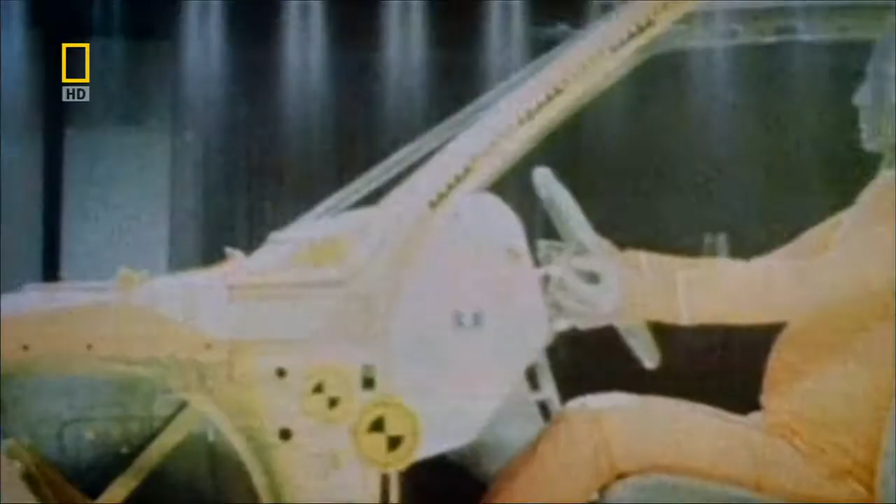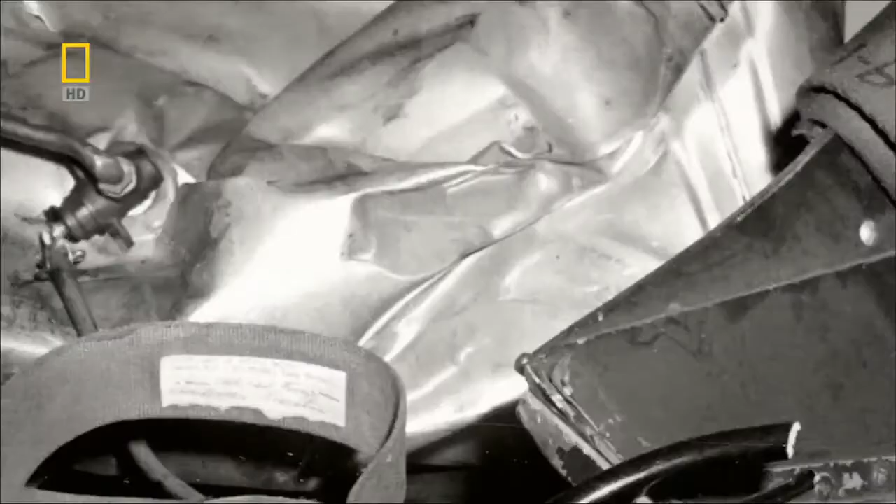Back in the 1950s, a researcher at Cornell University encountered the destructive side of inertia. His name was Hugh de Haven. After surviving a serious air crash, de Haven was motivated to study collisions. As surprising as it may sound today, back then, the common belief was that you were better off being thrown free in a car crash. De Haven realized the damage was done as passengers fly loose and impact their surroundings, and that inertia was the culprit. But restraining them would protect them.

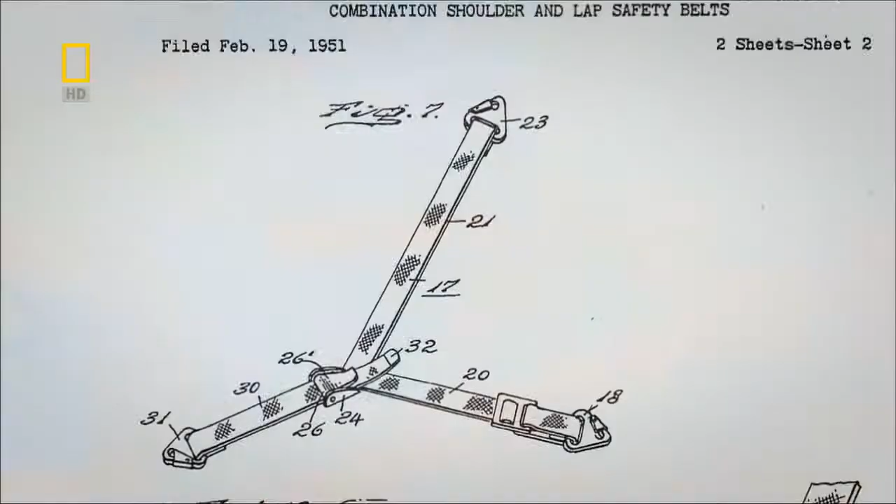In 1951, Hugh de Haven filed a patent for the 3-point seatbelt, and car passenger safety leaps forwards. Two decades later, the inertia reel safety belt is introduced, initially by Volvo and Ford. It leaves you free to move around, only locking under sudden movements. It uses the very same property of inertia that Hugh de Haven realized caused injury.

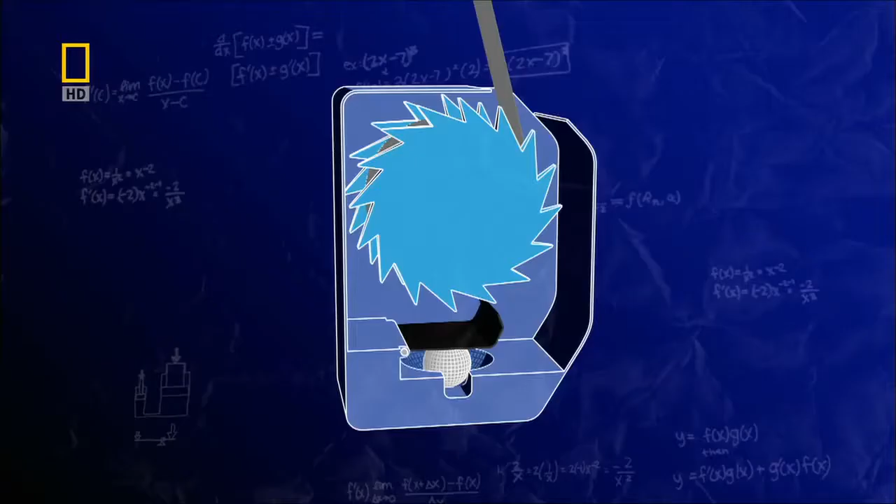Inside an inertia seatbelt sits a heavy steel ball. When a car is in a collision, the inertia of the ball means it will move independently. The moving ball hits an arm that pushes up and triggers a process that locks the belt.

Inertia is also harnessed in the giant 660-ton steel ball suspended at the top of Taipei 101. When the building sways, it swings like a giant pendulum, then pushes against oil-filled shock absorbers or dampers that dissipate the sway.

I want to check out the damper for myself, so I have permission to go into a construction area underneath it. It feels a bit like caving, except I'm in a tunnel over 80 stories up. Wow, here it is, the heart of it.

5.5 meters in diameter and made up of 41 separate steel plates. Only now do I get a sense of what a radical and inspired idea it is.

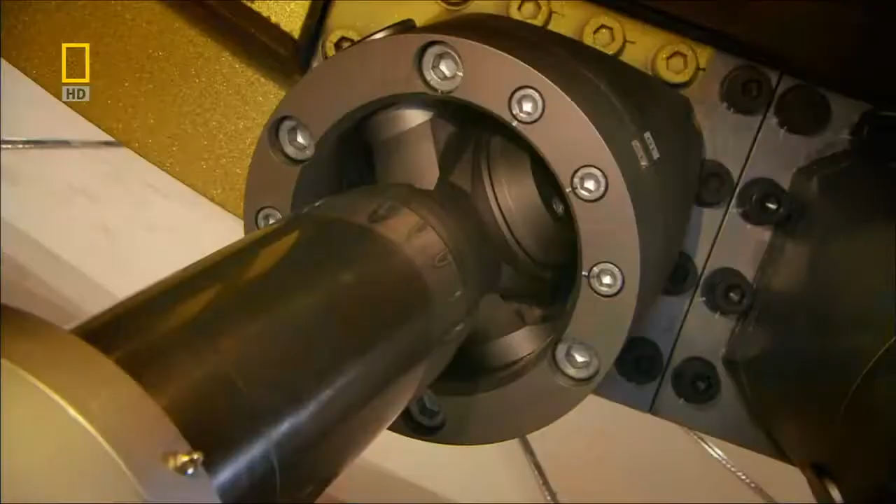Suddenly, now I see it, I understand much better about how it works. This massive ball, this weight, sits here in the middle of the building, and as the building starts to move, at first the ball resists that movement. Then it starts to move, but that's where these come into play, and they're kind of like the shock absorbers on your car, only massive. And as the ball moves, these absorb the energy, they soak it up.

And all of this is happening. Hundreds of tons of steel swinging about, 80, 90 stories up.

C.Y. Lee, the architect of Taipei 101, has his own demo of the damper at work. So I went to meet him at the top of his award-winning building.

When wind hits the building, it really moves. And it starts doing all that for a long time. It makes people uncomfortable working in the building.

So what we have designed is this. This is our damper, actually the heart of the building.

Lee explains his metal ball in this demonstration is in an oil-filled tube. This best represents the oil-filled shock absorbers attached to the giant damper.

So if you mount that damper in there. So this is now with your damper in.

Now the wind is blowing again, and... So it doesn't stop it moving, but once it started moving, it takes the violence out of the movement. It doesn't accelerate or slow down as quickly. It's a more gentle feeling.

I suppose what it's doing is giving you a better ride up here, isn't it? Buildings are for people to use, so if we cannot make the people comfortable, we don't have a good building.

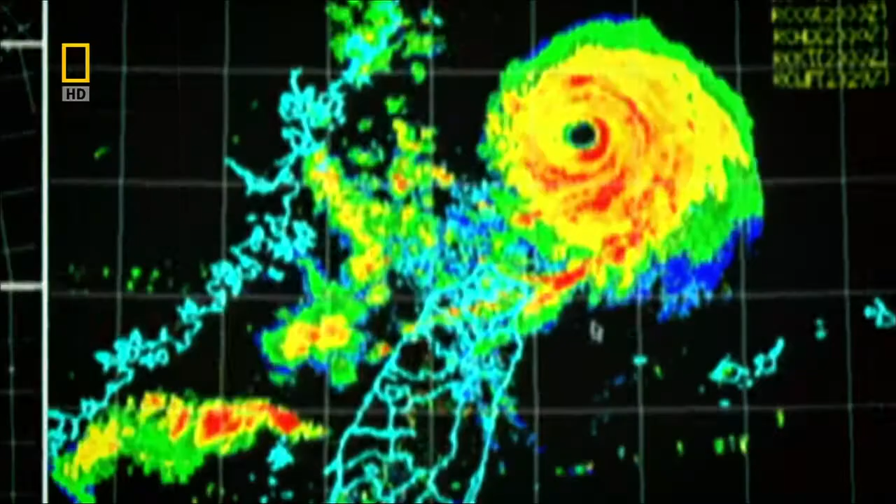On the 3rd of October 2005, Typhoon Long Wang blasts hurricane-force winds across Taiwan and presents the damper system with its first serious test. This film shows the ball in action as the 110 km/h winds blow that day.

As it begins to swing, the giant oil-filled cylinders take up the energy from 660 tons of swinging steel. This extraordinary footage, filmed on a cell phone, reveals the ball damping 545,000 tons of skyscraper as she sways in the typhoon.

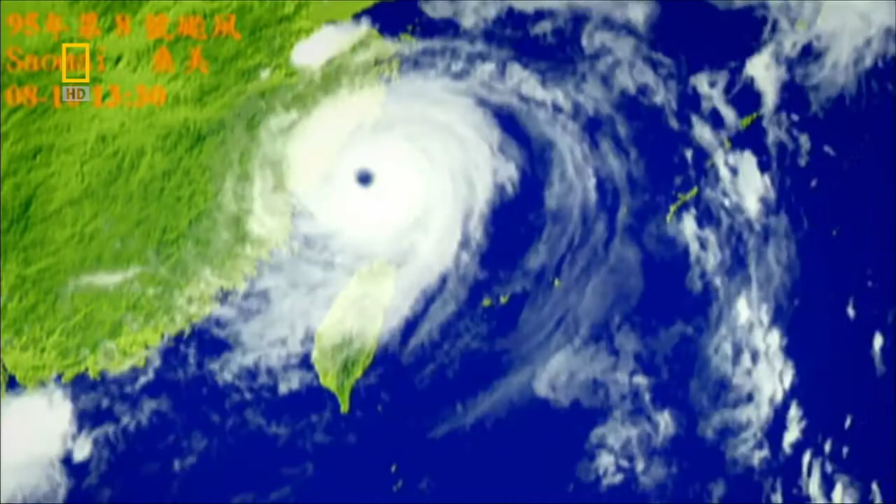After 3 hours, the winds abate, leaving Taipei 101 to face another day.

So, thanks to scientists from the past understanding inertia, today anyone can enjoy a calm ride in a storm at the top of one of the world's tallest buildings.

Looking down, watching the bustle of daily life on Taipei's city streets, it's hard to comprehend the incredible feats of design and engineering that went into making this extraordinary tower possible.

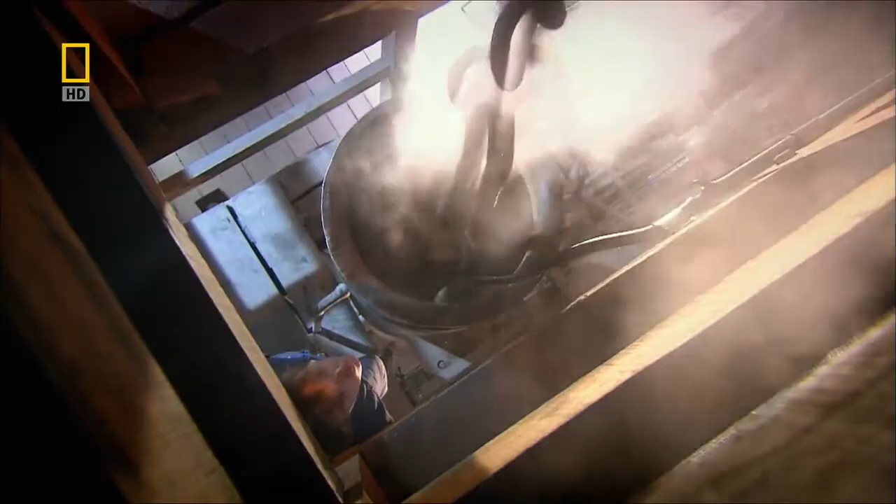Taipei 101 reaches skyward thanks to a birdcage. It's built to beat earthquake and typhoon with inspiration from bamboo and ancient outriggers. It uses Industrial Revolution-style piston power for world record concrete pumping. It calls on high-tech ceramics to stop the world's fastest elevators. And is inspired by the inertia seatbelt to have storm-beating stability. Taipei 101's exceptional engineering connections mean Taiwan's record-breaking tower is one of the modern world's most spectacular construction icons.

From down here, there's just no getting away from the size, the sheer presence of Taipei 101.

Now, where's my moped? There was a grey one like that, but not... No, that's... Oh, excuse me, is that... No, that's not mine. Why didn't I get a yellow one? One I could spot.